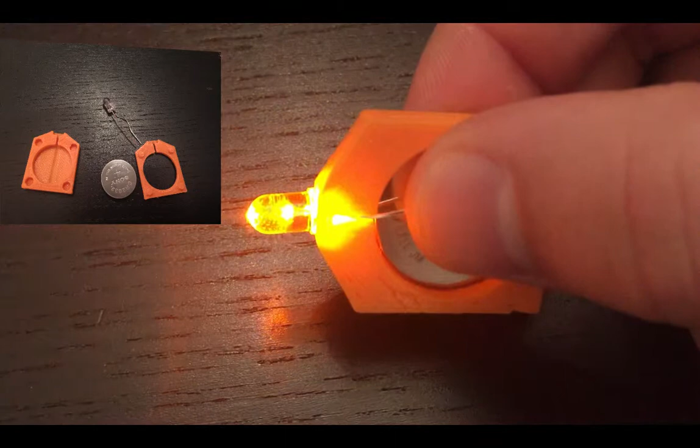In this video, we're going to use our 123D Design skills to create a flashlight using a coin cell battery and an LED.

I'm going to go ahead and rotate my canvas to the top view and start a sketch.

The first thing we're going to sketch is our coin cell battery. I'm using a CR2032, and I looked up the specs on Wikipedia, which said the diameter of the coin cell battery is 20 millimeters. That gives us a radius of 10, and then I'm going to add half of my material tolerance of 0.7, so I'll make this circle 10.35.

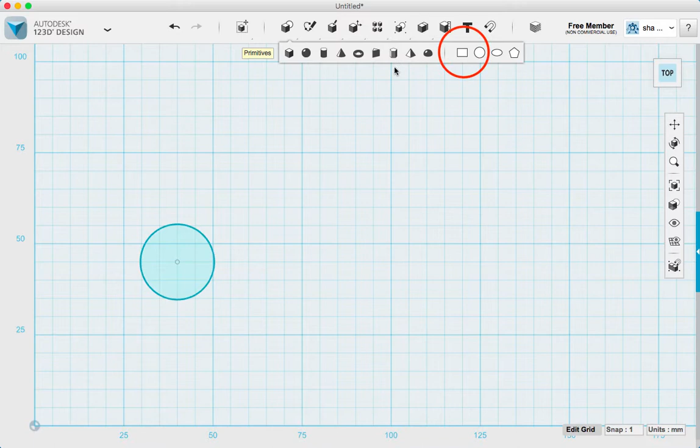Then I'm going to create the LED next. I'm going to give it a length of 1 and a width of 6.2. I measured the LED base and it had a diameter of 5.5 millimeters, so adding my material tolerance of 0.7 gives me the width of 6.2.

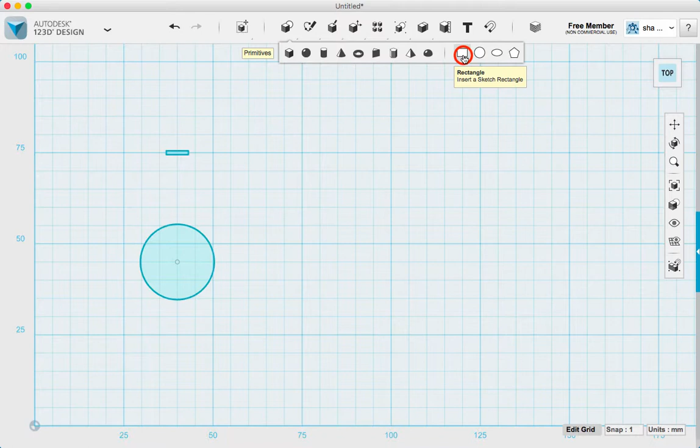Next, I'm going to create the little dome area of the LED, but using just a rectangle sketch. I'm going to set the length to be about 4, and the width I got was 5 millimeters. Again, adding my material tolerance of 0.7 gives me 5.7.

I'm just going to do a rough lineup of these two pieces. If you zoom in, you can get a better lineup.

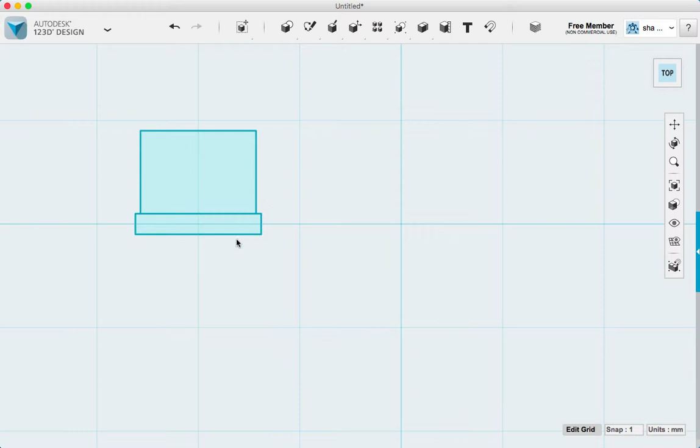Next, I'm going to sketch out the leg of the LED, or the contact. I'm going to set the length to be 25.7 millimeters. The width of the leg is 0.5 millimeters, so if I add my material tolerance of 0.7, I'll get a value of 1.2 as my width.

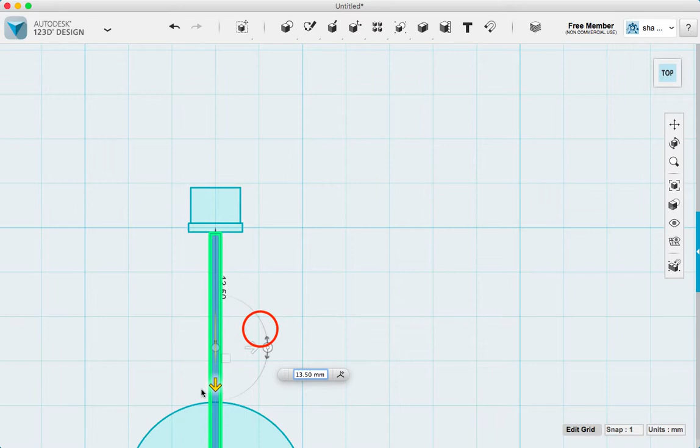Again, I'm just going to line these up pretty roughly, just so there's some overlap when I start to do the extruding.

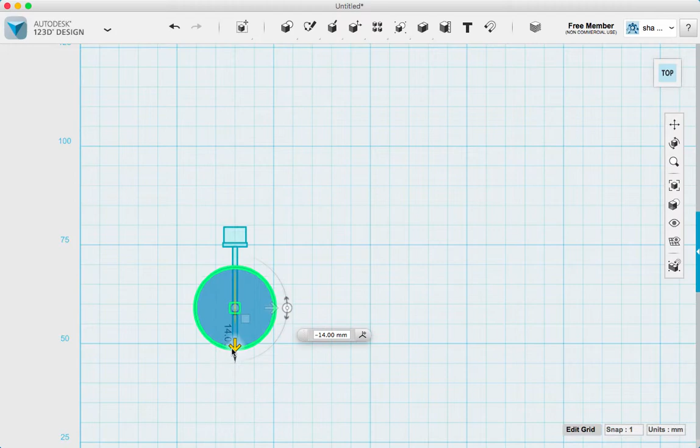Next, I'm going to make sure that the coin cell battery is overlapping the LED. You want to make sure it's on the legs of the LED, because those legs have to make contact with the coin cell battery.

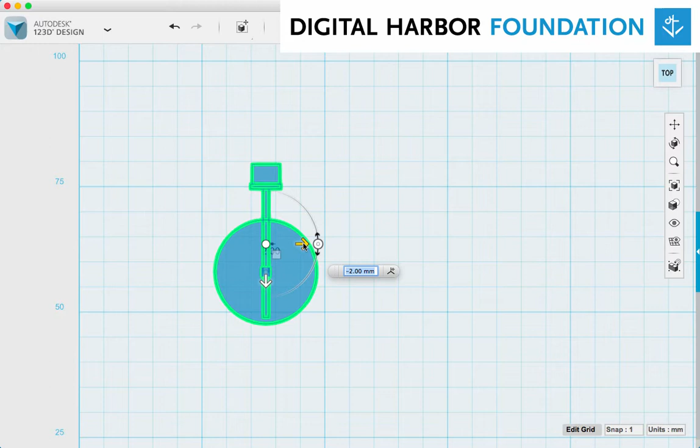I'm just going to roughly center it. Next, I'm going to reposition my coin cell and my LED so that they're in the middle of some grid lines, so I can use the grid lines with my sketches.

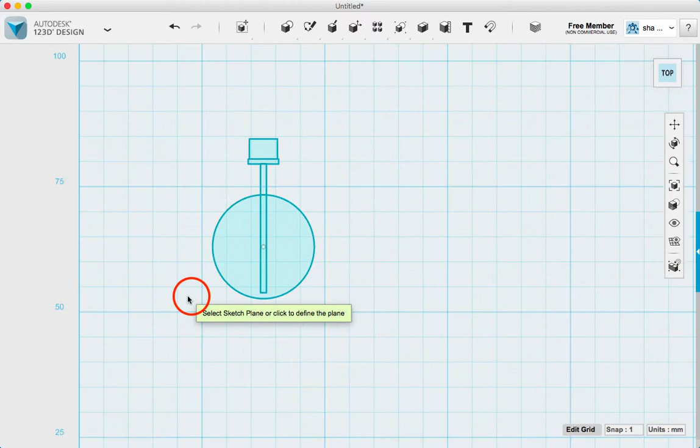Next, we're going to use the Polyline Tool to create a sketch of our actual flashlight case around these elements. I'm going to go ahead and just draw around it.

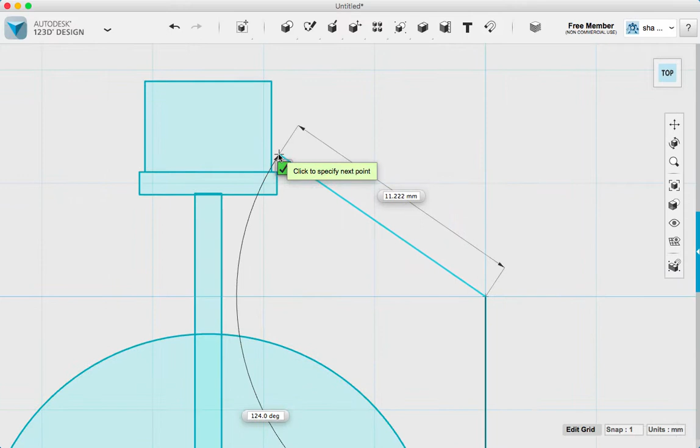Now I want to make sure that the dome of my LED sticks out, but I'm going to try and use that wider base as a lip to keep it contained in the case. So I'm going to put the top of my line over that lip, but not crossing either one.

All right, now we'll build it across, so that whole dome piece should stick out from our flashlight, but that little lip will get held in with the base.

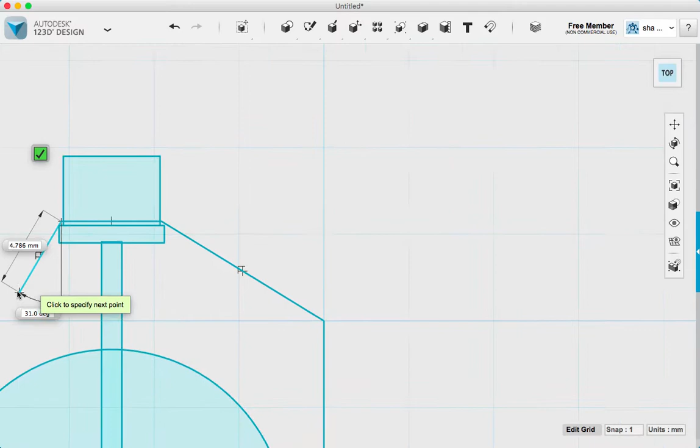All right, and now we have the base shape of the flashlight.

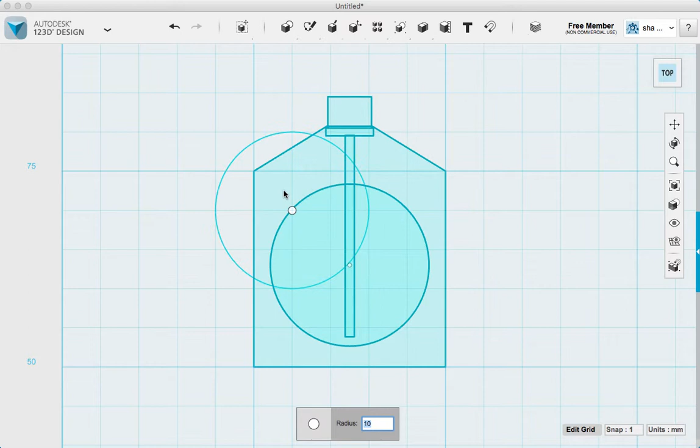Since this is going to print in 2 parts, I'm going to create some recesses or holes that I can stick pegs into from the top part into the bottom part to hold it together. I think I want a diameter of 3, so I'm going to set the radius for these holes to be 1.5.

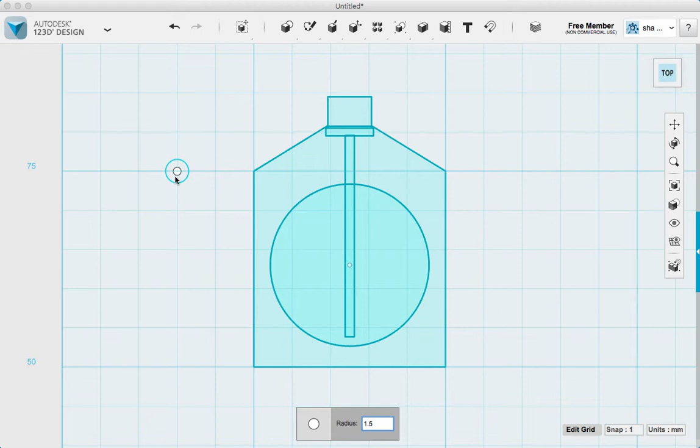I couldn't really get it to lock in place where I wanted it, so I sketched it outside of the flashlight case, and then I'm going to move it in to where I actually want it to be. Now I'm just going to copy and paste this and make 4 holes.

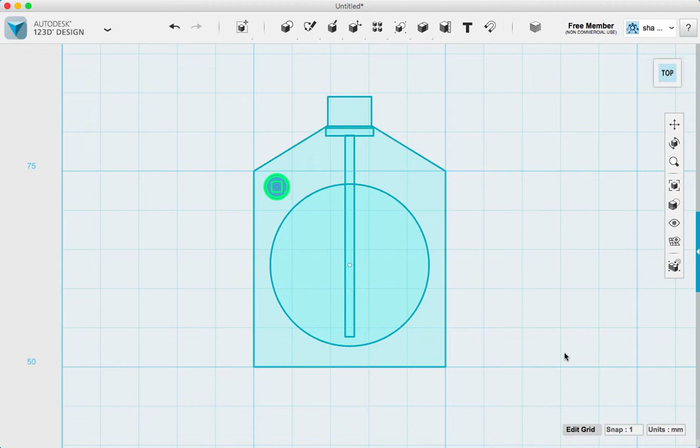Now that I've got the basic shape of my flashlight sketched, I'm actually going to create a copy of it and move it over just a little bit. So one piece, or one side, will be my bottom, and one piece will be my top.

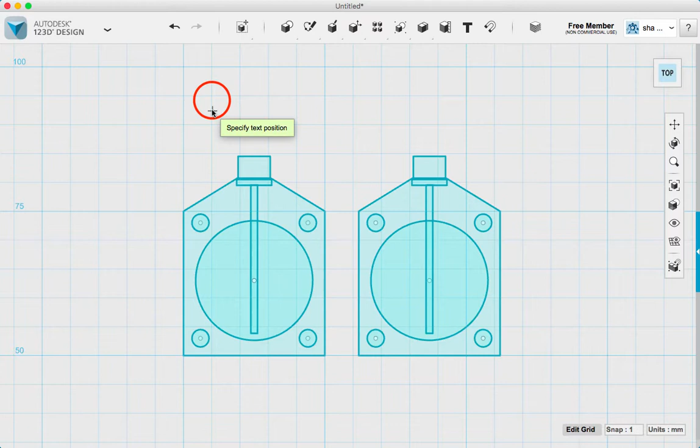So you can see where I'm working, I'm going to go ahead and label them in 123D Design, but this is not part of the design. I'm just adding this for clarification as we're going along.

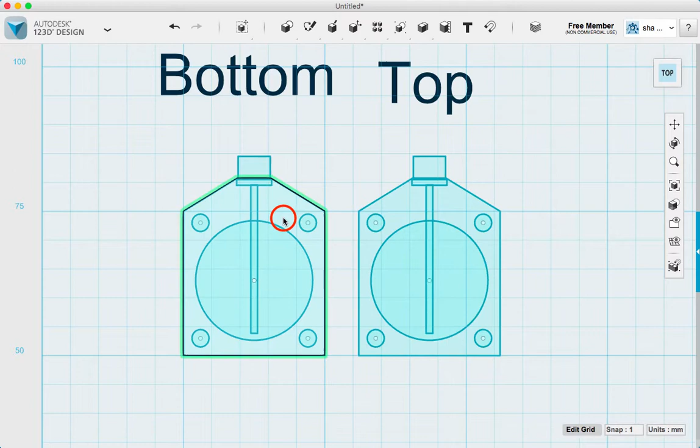So the one on my left will be the bottom and the one on the right will be the top. With the bottom, I'm going to select the main flashlight outline and go ahead and extrude it up, about 4 millimeters right now.

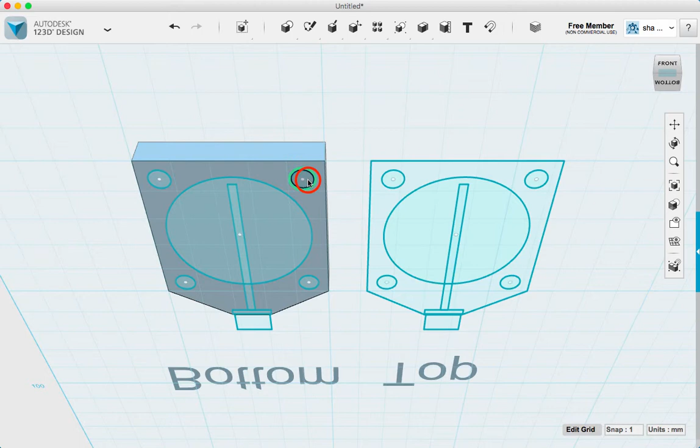Now, I actually want to extrude the rest of those sketches from the top of my flashlight case. So I'm going to go down, grab those sketches, and move them up to the top of that solid.

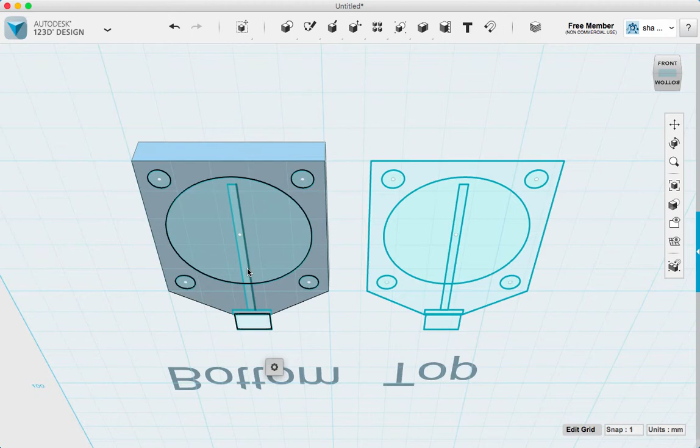You may need to zoom in a bit to get all of the sketches selected. Now I'm just going to move all of those sketches on top of my solid, moving them up 4 millimeters.

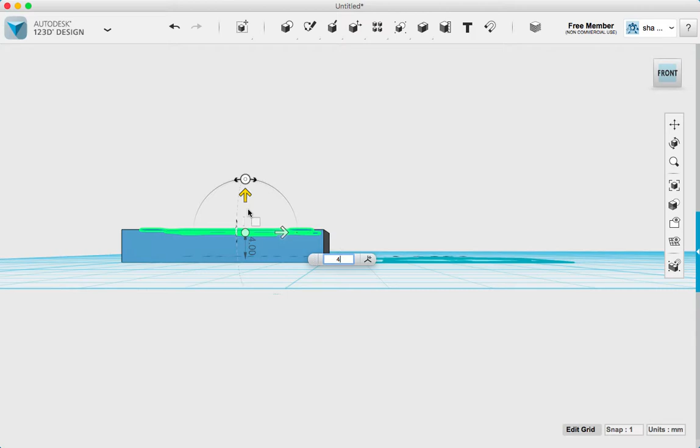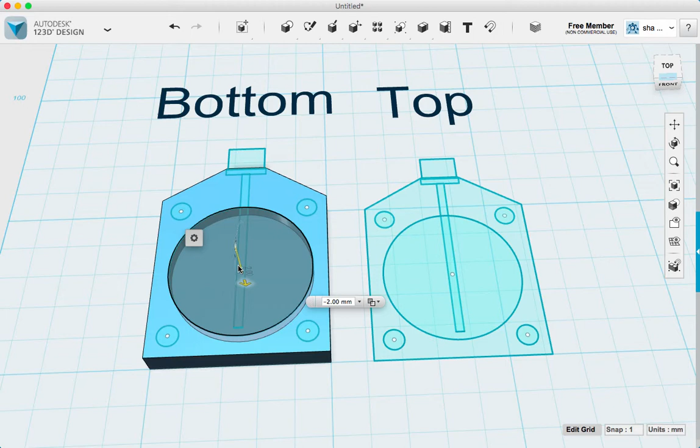I'm going to go ahead and extrude the coin cell area down. I'm going to extrude the coin cell hole down about 3.2 millimeters, which is the thickness that Wikipedia said that battery size is.

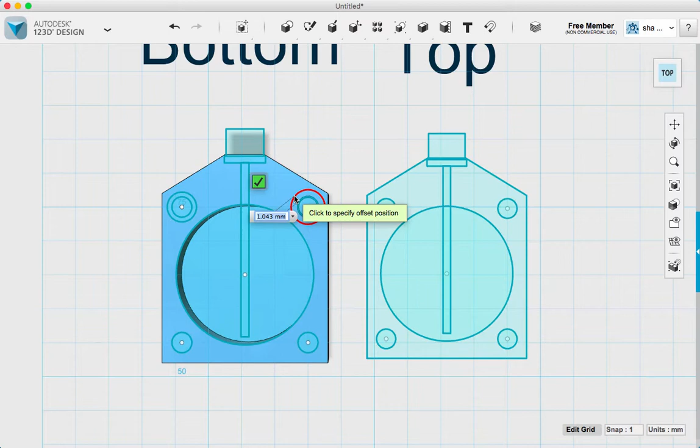The next thing I'm going to do is the holes that are going to hold the two halves together. The pins are going to be one size on the top, and the holes will be on the bottom. I'm going to create offsets on the bottom pieces so that the pins will make sure they fit in there. If I didn't create these offsets, the hole would be the exact same size as the pins, and they might not fit, so I'm just going to expand them by 0.7.

Then I'm going to go back and delete the inner circle. This will make sure I have a hole just slightly bigger than the pegs I'm going to be putting in them.

I'm going to extrude these holes down about 2.5 millimeters.

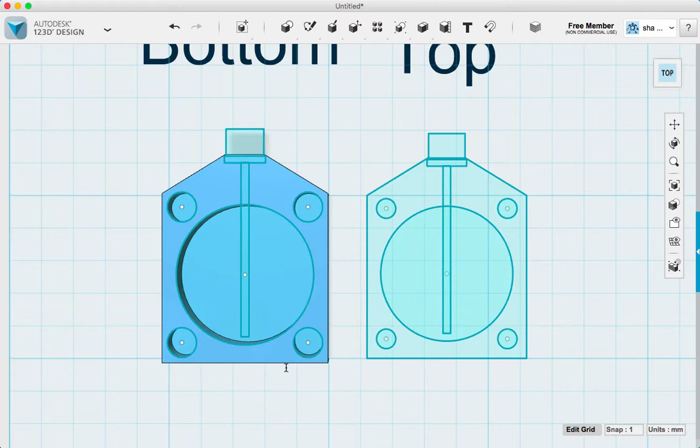Next, I'm going to extrude down the area filled in by the LED, but I don't want to take it all the way through, so I'm just going to take it down about 3.5 millimeters.

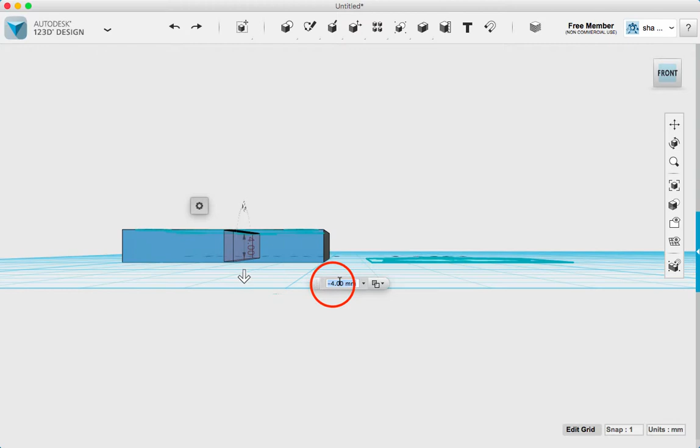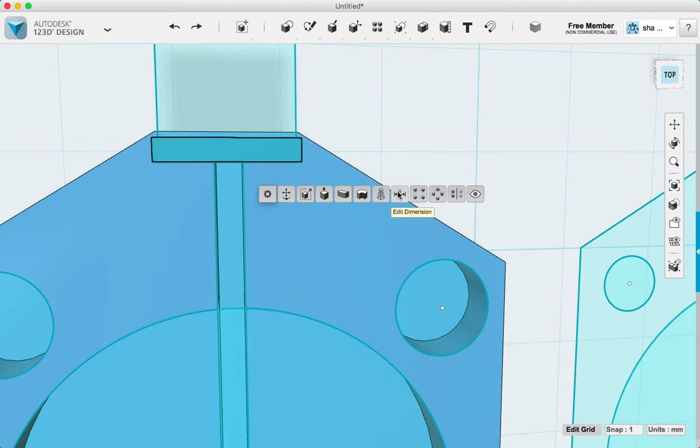Now the base of the LED, I realized I made it exactly 1 millimeter in length, and it probably should have been 1.7 millimeters to allow for my material tolerance. So I'm going to grab that top edge of the base and drag it up until I get something around 1.7.

Now I need to move that whole box back down so that it's inside the flashlight.